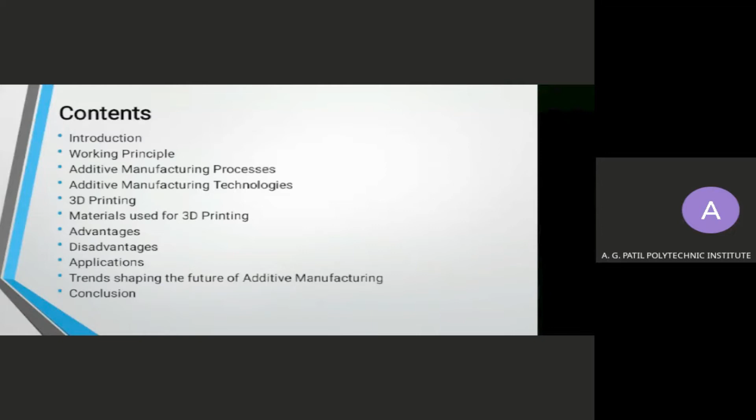So these are my contents. First of all, what is additive manufacturing? 3D printing or additive manufacturing is the construction of a three-dimensional object from a CAD model. As its name suggests, instead of removing material, it adds a layer of material one by one. In this process, material is deposited, joined, and solidified under computer control.

In the 1980s, 3D printing techniques were considered suitable only for production of functional or aesthetic prototypes. But from 2019, it is in the news for its precision, repeatability, and material range. The main advantage of 3D printing is to create complex shapes or geometries which are impossible to create or construct by hand. Fused deposition modeling, which uses a continuous filament of thermoplastic material, is the most common method used in recent days.

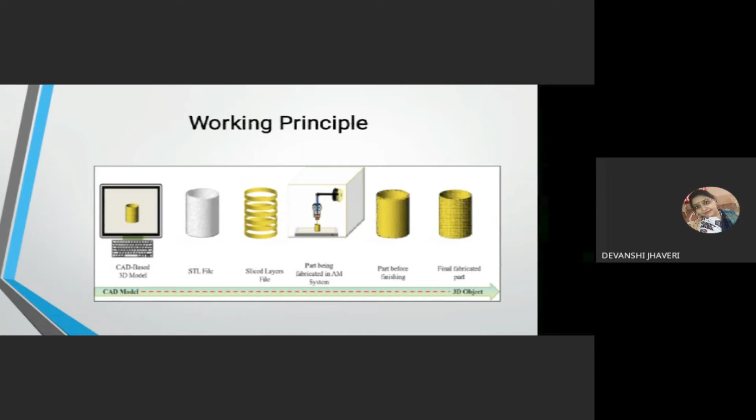The next one is part removal. In some cases, after building a part, it may need a cooling off period before removing the part from the machine. Depending on the machine and technology, removal could vary from simply peeling off the build platform in case of FDM, to wire eroding from the build plate in DMLS. The last step is post-processing, where the manufacturer thinks from the aesthetic point of view. Post-processing such as cleaning, polishing, painting are required to give an attractive look to the manufactured object.

Next slide, additive manufacturing technologies. These are the various additive manufacturing technologies. First one is binder jetting process. It selectively deposits a bonding agent or binding liquid to join the powder material to form a 3D part. It is different from other additive manufacturing techniques as it doesn't employ heat during the process to fuse the material.

Next one is directed energy deposition. It uses focused thermal energy such as a laser, electron beam, or plasma arc to melt and fuse the material as it is deposited to create a 3D object. It has two main types: one is LENS and another is EBAM.

Next is the material extrusion process. In this additive manufacturing technique, a continuous filament of thermoplastic is fed through a heated nozzle before being deposited layer by layer onto the build platform to create the object.

Next procedure is powder bed fusion, a manufacturing technique that uses either a laser beam or electron beam to melt and fuse the material to form 3D geometrical parts.

Next is sheet lamination. It uses sheets of material to create 3D objects by stacking them and laminating them using either adhesive or ultrasonic welding. Once the object is built, the unwanted areas of the sections are removed layer by layer.

Next process is vat polymerization. It uses a technique called photopolymerization, in which radiation curable resins or photopolymers are used to create 3D objects by selectively exposing them to ultraviolet light.

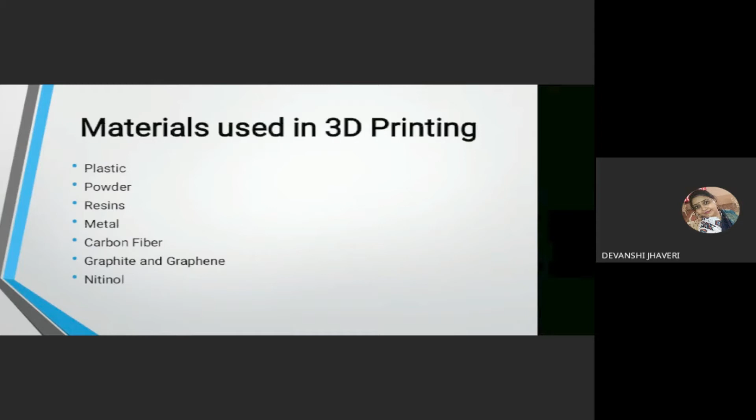So these are the materials used in 3D printing, like plastic, powder, resins, metal, carbon fiber, graphite and graphene, and nitinol.

Advantages of additive manufacturing. Here are various advantages we can achieve by using additive manufacturing, like saving on material and energy waste, prototype costs much less, small production runs are fast and less expensive, and much on-hand inventory is not needed. This means additive manufacturing requires only the specific quantity of material as per the dimensions of the object to be manufactured, so it doesn't require inventory of raw materials on a large scale.

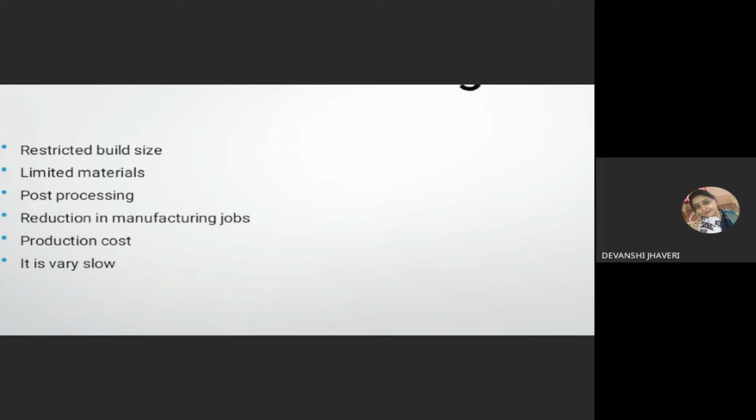So here are the disadvantages of additive manufacturing. Restricted build size: when we go for additive manufacturing, we have a limitation of size, and limited materials. Post-processing: additive manufacturing is a process which requires post-processing methods. It will also result in a reduction of manufacturing jobs. Production cost is high, and in case of additive manufacturing, it is also a very slow process.

So these are the applications of additive manufacturing. First one is automotive; it is used to make prototypes of brackets and door handles, suspension wishbones and dashboard interfaces, headlights, and etc. Next one is consumer products: jewelry manufacturing, dental products, medical, educational and engineering.

Next one is energy. 3D printing for energy applications explores current and future perspectives of 3D printing for the fabrication of high value added complex devices.

Next one is medical. Bioprinters are capable of creating functional tissues.

Next one is transportation. It aims to create lighter and stronger resin structures that can be easily transported from one place to another. These are the trends shaping the future of additive manufacturing.

Next is increased focus on machine connectivity. This means if a manufacturer wants to create a prototype of a jet engine and uses machine connectivity, he is going to connect the 3D printers with each other. Suppose there are four 3D printers, in which one is responsible for manufacturing the low pressure and high pressure turbine, one is for the combustion chamber, and one is for the turbine shaft.

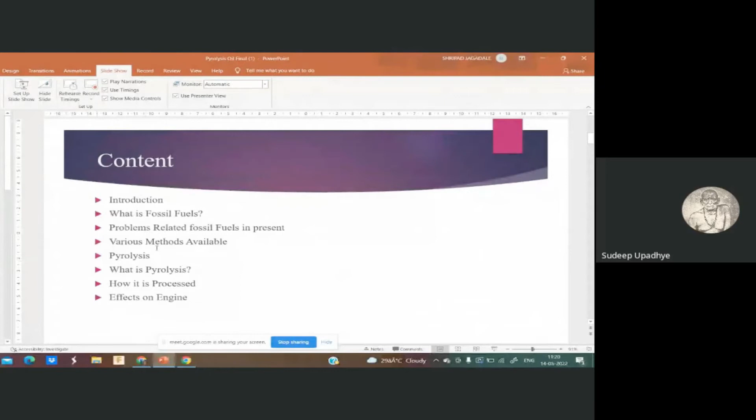So ma'am, is it visible to you all? Yeah yeah, this is visible. Okay so shall I start? You can start, Soham. So a very good morning, you are not visible, please turn on your camera. Okay sir, just a minute. Wait, let me have the light.

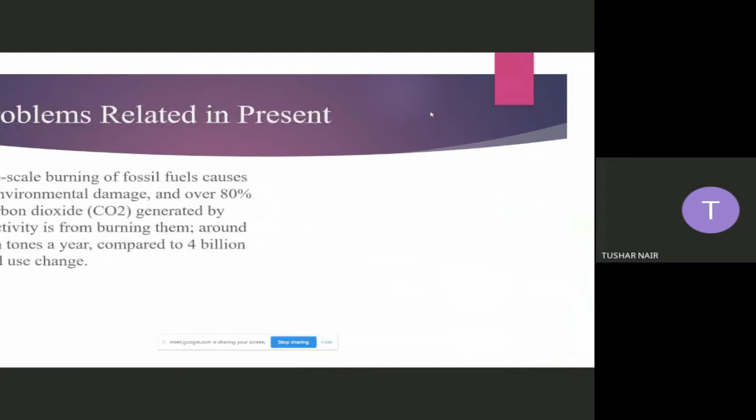What is fossil fuel? Large scale burning of fossil fuel causes serious environmental damage, and over 80% of carbon dioxide generated by human activities is from burning them. There are many problems related to this, like carbon dioxide and other pollution. Basically, we all know that fossil fuel is from decaying animals, etc.

How much are petrol and diesel prices expected to increase? There's a methodology called demand and supply - when demand is less, the price is low. But nowadays we can see the price of petrol touching the skies. Why is that so? Because fuel is not available, or maybe less in amount nowadays, and as demand increases, the price also keeps increasing.

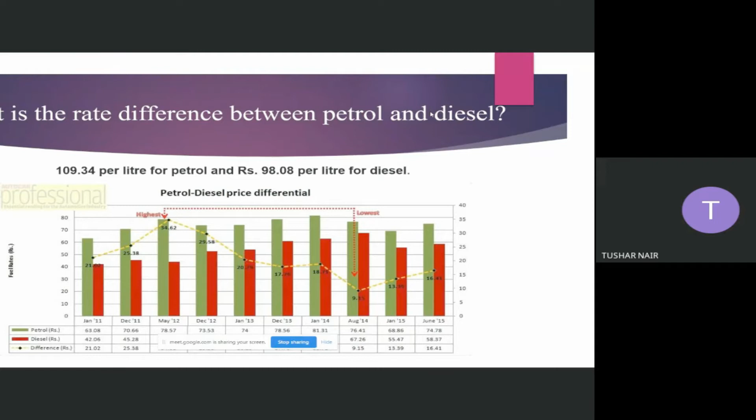So basically, the most wonderful and dangerous material - if I'm not wrong, we can say plastic is the wonderful material. We humans wanted something that lasts long and weighs less. There's a proverb in English: be careful what you wish for. And yeah, plastic was invented. The positive point of plastic is that it lasts a very long period, more than 500 years - which is also its most negative point.

It causes a lot of pollution, whether air, water, or land. Plastic is something we can't bury in the ground. The ocean can't handle it, life can't decay it, and life can't manage it. So is there any alternate source for this? The answer is yes - there are many ways to reduce plastic pollution by converting plastic into useful resources.

We know plastic is just crude oil that has been processed in different ways, and through pyrolysis we can reverse it. Plastic pyrolysis is a very effective process where plastic is exposed to high temperature in the absence of oxygen. Pyro means heat and lysis means breakdown.

At any given temperature, molecules are in a vibrating state - this is called molecular vibration. The frequency at which molecules vibrate is directly proportional to the temperature of the molecules. During pyrolysis, molecules are subjected to very high temperature, leading to very high molecular vibration. At this high vibration, molecules start breaking down into smaller molecules, and this is known as pyrolysis. Plastic is hard to break down, so we have to add a catalyst to it.

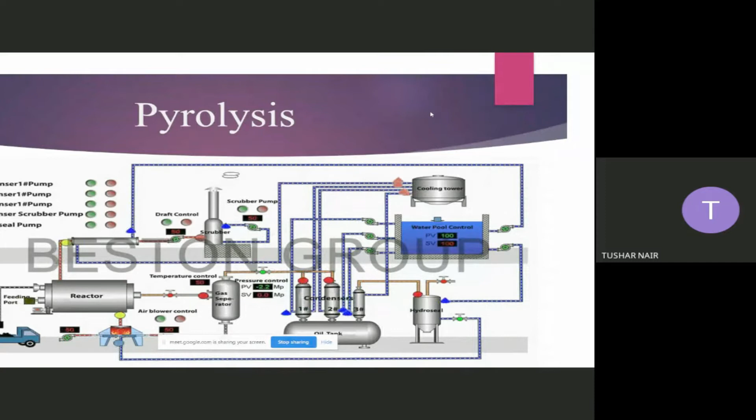This gas is sent into a condenser, where condensation takes place, and finally it's sent for refining, where fuel is created. So hence we can say 80% oil, 15% gas, and 5% carbon black is produced.

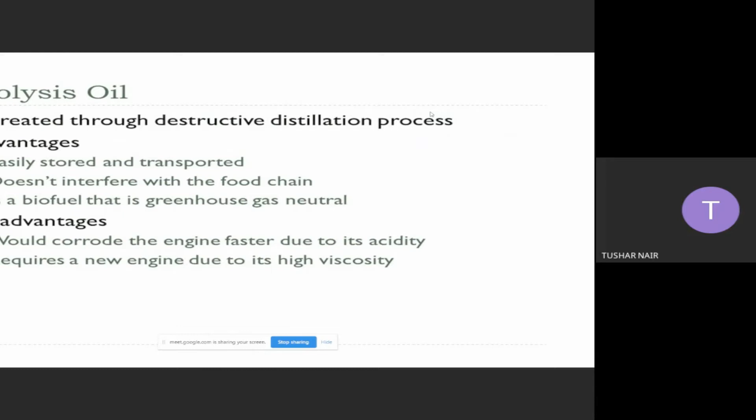So here are the advantages and disadvantages. There are much more job availabilities in this sector. We can say that pyrolysis is the best method, as we humans who created plastic are also going to be harmful due to this, as it generates fuel directly from it.

So, conclusion. We can say this is one of the steps towards our green environment, which will maintain our green and beautiful Mother Earth. This pyrolysis is very important as it also helps in fuel generation, which sounds really interesting. Thank you.

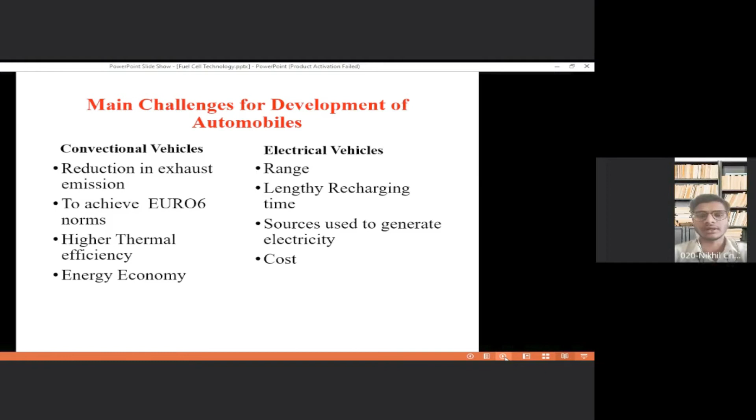And also, the fuels we use for conventional vehicles are all imported from outside. Means we are spending a lot of money importing and purchasing that fuel. So these were all the problems.

So to give the solution to these problems, we are here with a new concept, which is fuel cell. So basically, what is a fuel cell, I would like to explain in brief. Fuel cell is like a battery, but it is not a battery. Why am I saying it is like a battery? Because it produces electricity through an electrochemical process. That is the single similarity between a battery and a fuel cell.

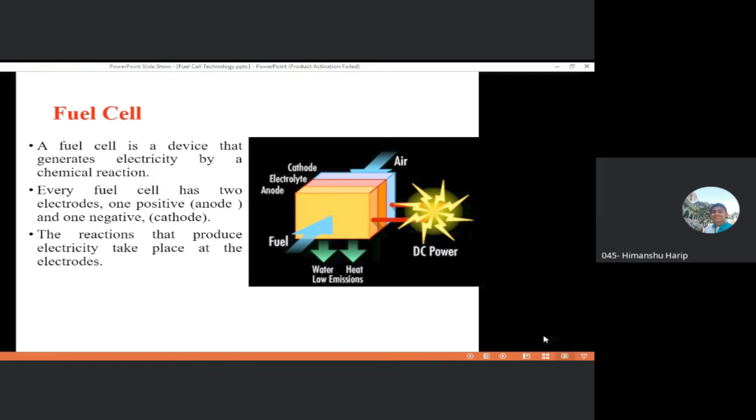If a fuel cell is combined together to form a fuel cell stack, enough power is able to be created to power a car or a truck. This is a simple animation showing the working of a fuel cell.

Hydrogen from an onboard pressurized tank is supplied to a catalyst where electrons are stripped from the parent hydrogen. These electrons are supplied to the electric motors or to the auxiliary electrical components which require electricity to run.

Once the work of the extracted electrons is done, they come back to the parent fuel cell where they reunite with the parent hydrogen in the presence of oxygen. They meet in the ratio of two atoms of hydrogen and one atom of oxygen, which is nothing but water, H2O.

This water is used to cool down the fuel cell stack. The accelerated electrons generate a lot of heat, ranging between 100 to 200 degrees Celsius. This heat is cooled down with the help of water, a byproduct of the fuel cell, before it is dripped out of the vehicle tailpipe as water vapor or distilled water.

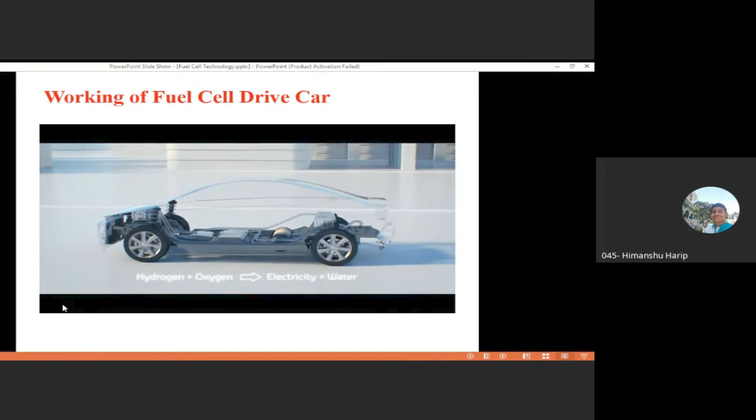So this is the fuel cell vehicle, with the video given to us by Toyota itself. The basic chemical reaction that takes place is hydrogen plus oxygen gives electricity plus water.

It consists of a hydrogen tank, a battery, a fuel cell stack, a boost converter, an electric motor, a power converter, and an electrical ECU.

In normal conditions, hydrogen is supplied to the fuel cell stack from the onboard pressurized tank. Oxygen is taken in from ambient air and supplied to the fuel cell stack, and the energy is given to the motor, with the output being nothing but water.

During filling, the hydrogen is pressurized under 700 bar or 70 MPa, and the refueling time is nearly 3 minutes, giving the user an experience similar to that of an IC engine car.

During very low load conditions, when there is absolutely no load on the motors driving the car, the energy is supplied from the battery and the motor runs just like in a simple electric vehicle.

During low load conditions, the energy is supplied from the fuel cell stack, and the motor runs. As the motor runs, it charges the battery, so basically the fuel cell stack charges the battery.

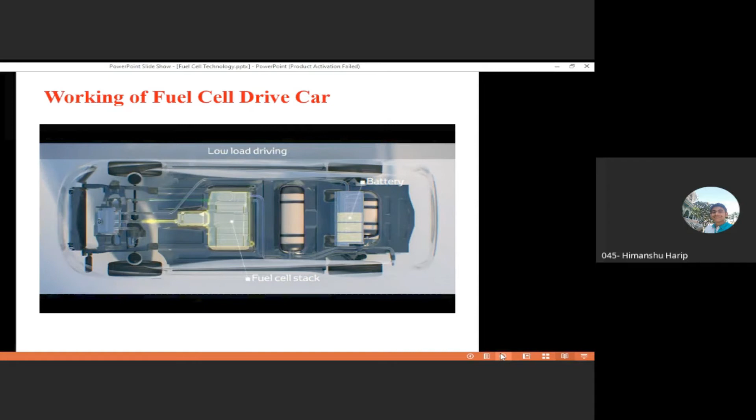During high load conditions, such as driving in a hilly or ghat region, the energy is supplied from both the battery and the fuel cell stack. This decreases the load on the battery and increases the efficiency of the electric vehicle along with the increase in range.

During energy recovery mode, such as when going downhill, the motor acts as a generator and charges the battery. It's simple.

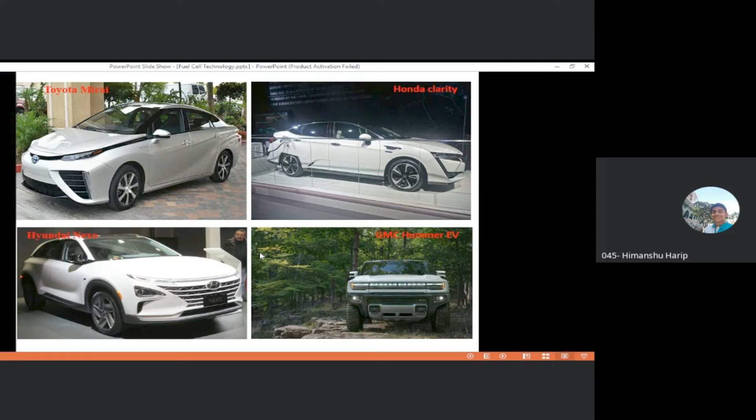It is a huge vehicle. It does not use that much of it, it uses 20% fuel cell vehicle technology. The rest is totally based on electric vehicle technology, as it's a huge car.

And these are some Indian companies, such as Tata Motors. They have bought 15 hydrogen-based fuel cell vehicles, which we can see on the Mumbai Pune Expressway easily.

So these are the fuel cell aspects: the mileage or average that a fuel cell vehicle can achieve is 70 miles per equivalent gallon (MPEG). The cost of 1 liter of hydrogen is just rupees 30 to 60, compared to petrol which is nearly 110 to 120 rupees per liter. The time required for refueling is also less than that of a gasoline engine.

The cost of a sedan hydrogen fuel cell vehicle is a bit more, nearly 30 to 40 lakhs. They are safer than IC engine powered vehicles, as hydrogen is the lightest gas in the periodic table. So these are the references we have referred to.

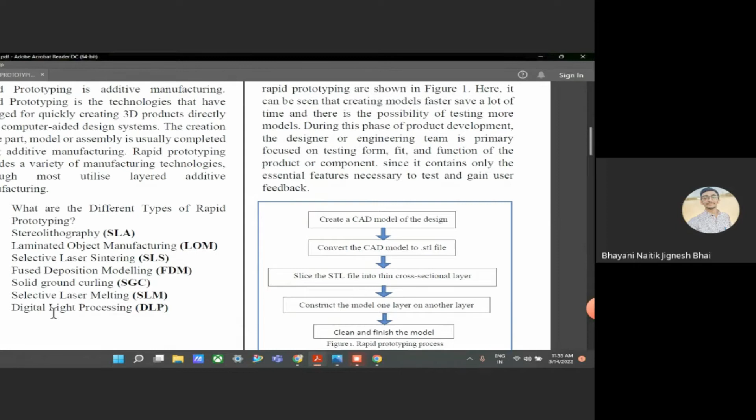The process is the rapid prototyping process. The steps involved in product development using rapid prototyping are shown in the figure. It can be seen that creating a model faster saves a lot of time, and there is the possibility of testing more models during the phase of product development.

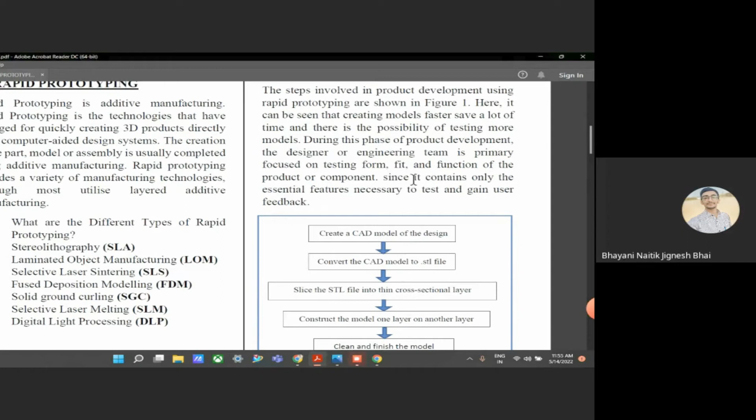The designer or engineering team is primarily focused on testing form, fit, and function of the product or component, since it contains only the essential features necessary to test and gain feedback.

Our steps for rapid prototyping are this: first, we create a CAD model of the design if we have a model. If we don't have a model, we take dimensions using a CMM machine, that is a coordinate measuring machine, and then convert the file into STL files.

Then these STL files are converted into a slice format for manufacturing in a 3D printer, and then the model is constructed one layer at a time, followed by post-processing methods like cleaning, finishing, and measuring.

Rapid prototyping is a digital manufacturing process. This allows product designers to test multiple iterations of a design within a short period of time and finalize the design more quickly. It could include building a model from thermoplastic, PLA, nylon, ABS, acrylic-based photopolymers, or liquid silicone rubber.

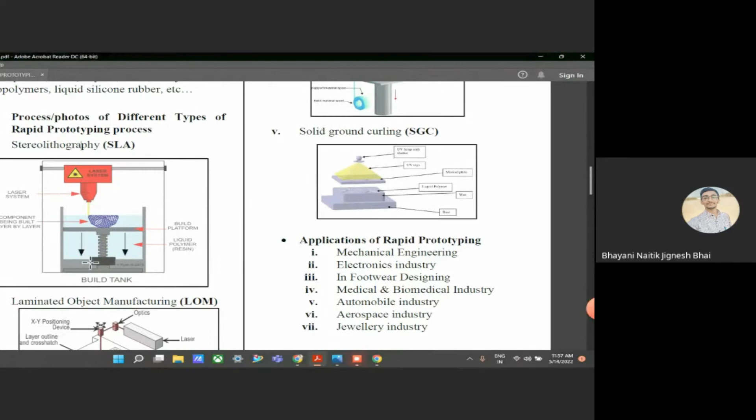These are process photos of different types of rapid prototyping. First is laser stereolithography, this photo, and this is laminated object manufacturing. This is selective laser sintering. And this is fused deposition modeling.

This method is very simple and commonly used in 3D printing. So last is solid ground curing.

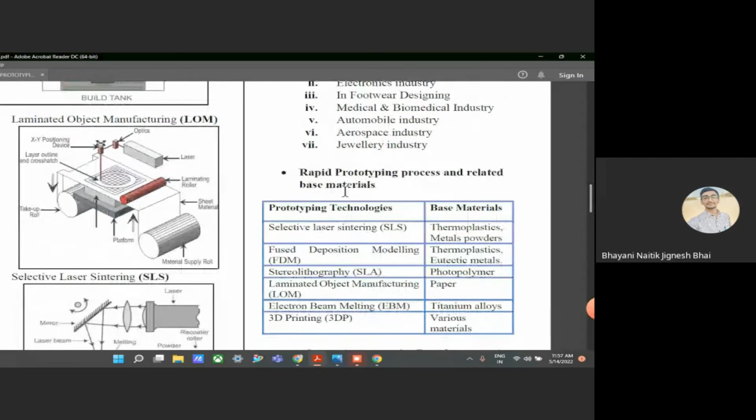Applications of the rapid prototyping process include mechanical engineering, electronic industry, footwear designing, medical and biomedical industry, automobile, aerospace, and jewelry. These are rapid prototyping related base materials for 3D printing or related processes.

First is SLS, its base material is thermoplastic and metal powders. Second, FDM, there it's thermoplastic and eutectic metals. Third one is stereolithography, there it's photopolymer and liquid resin. There is used paper.

Then alternative names of rapid prototyping: first, additive manufacturing, layer manufacturing, direct CAD manufacturing, and solid freeform fabrication.

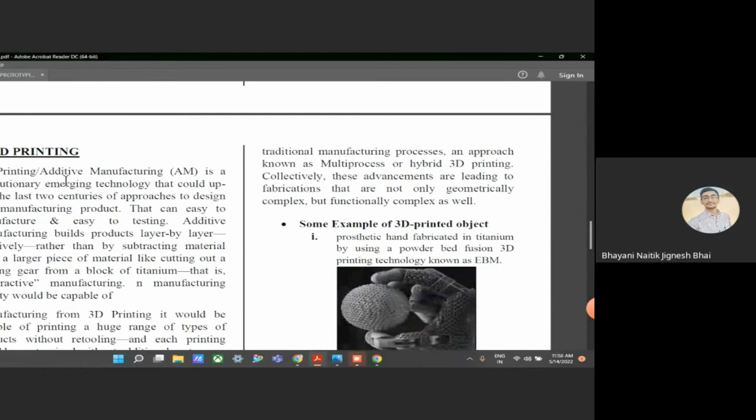Now our topic is 3D printing. 3D printing, also known as additive manufacturing, is a revolutionary emerging technology that could upend the last two centuries of approaches to design and manufacturing, producing products that are easy to manufacture and easy to test.

Additive manufacturing builds products layer by layer additively, rather than by subtracting material from a large piece of material, like cutting a landing gear from a block of titanium.

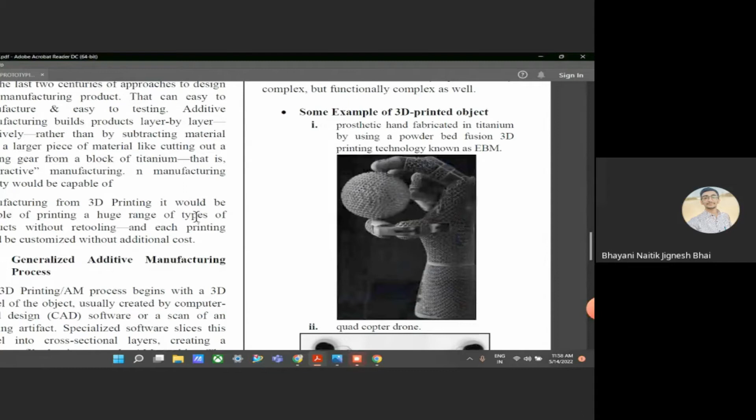That is subtractive manufacturing. A manufacturing facility capable of 3D printing would be capable of printing a huge range of types of products without retooling, and each printed item could be customized without any additional cost.

Now, the generalized additive manufacturing process. The 3D printing / additive manufacturing process begins with a 3D model of the object, usually created by CAD software or a scan of an existing artifact. Specialized software slices this model into cross-sectional layers, creating a computer file that is sent to the additive manufacturing machine.

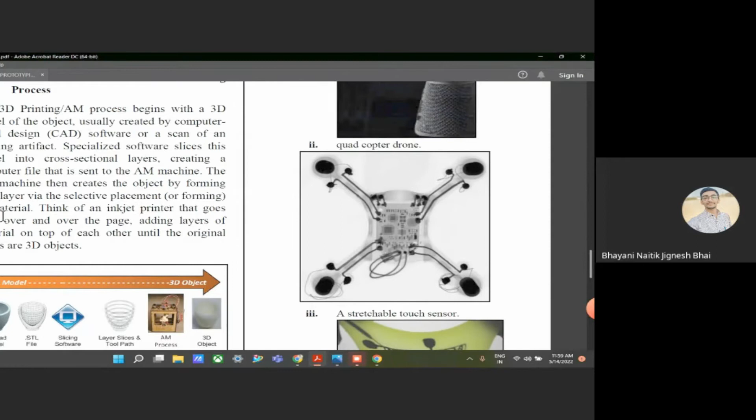The additive manufacturing machine then creates the object by forming each layer via selective placement or forming of material. Think of an inkjet printer that goes back and forth over the page, adding layers of material on top of each other until the work is complete. This is a diagram.

First we create a CAD model, then it's converted into an STL file, then transferred to slicer software where they slice the part, then it goes through the additive manufacturing process using a 3D printer, followed by post-processing to complete the project.

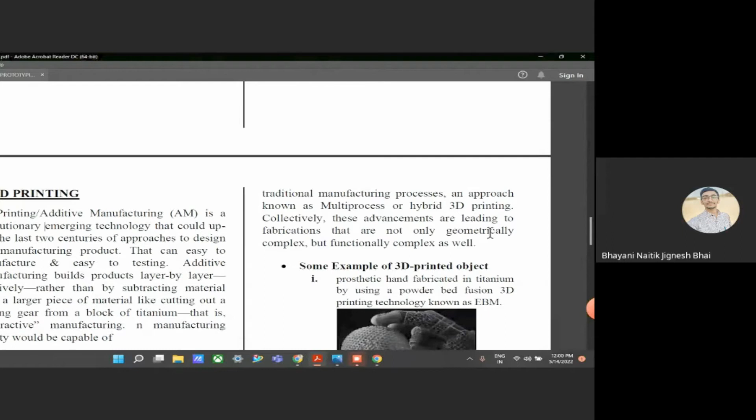Advances in 3D printing: for the technology to become more widely adopted in mainstream manufacturing, 3D printing must provide end-use products by fabricating more than just simple structures, with sufficient mechanical strength to retain shape. Recently, research has enabled the use of new materials with commercial 3D printers, and customized printers have been enhanced with complementary traditional manufacturing processes, known as multi-process or hybrid 3D printing. Collectively, these advancements are leading to fabrications that are not only geometrically complex but functionally complex as well.

These are some examples of 3D printed objects. First is a prosthetic hand fabricated in titanium using a powder bed fusion 3D printing technology known as EBM. Second is a quadcopter, which is a drone-type structure.

This is a stretchable touch sensor. It's a sensor, but you can stretch it. This is a capacitive touch sensor - you can click or touch this sensor.

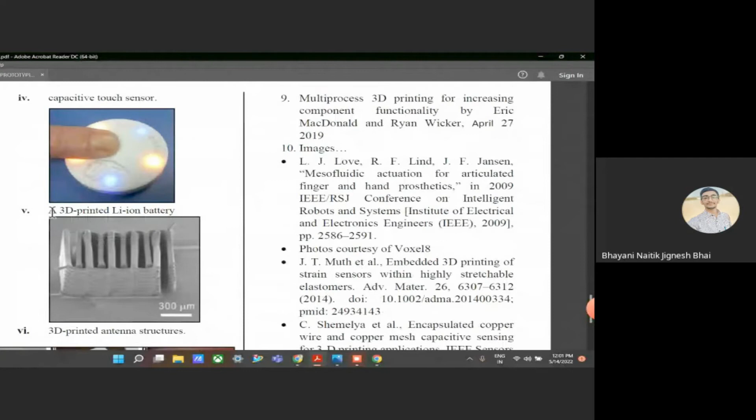This is a 3D printed lithium-ion battery, also used in our mobile phones or electronic gadgets. And finally, this is the 3D printed antenna structure, also known as NFC for our mobiles, related to tag cards and related technologies.

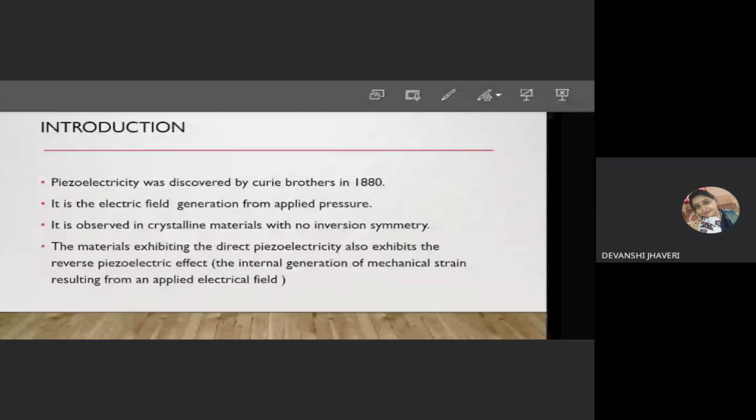Let's talk about piezoelectric crystals. We can get the crystals naturally as well as synthetically. Naturally, we can get silk, dentin, enamel, quartz, and sugarcane is also a piezoelectric crystal. Synthetically, we can get lithium sulfate, zinc oxide, and too many other things.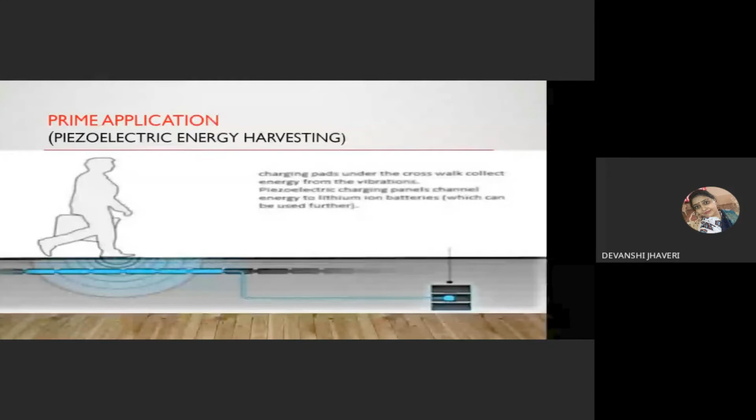We all know there is a problem for electric vehicles: the charging station. In all of India, we have just 1,600 charging stations. If we introduce piezoelectric charging pads under footpaths, we can directly give supply to those electric charging stations.

It will be the solution to that problem. These are some other applications. We all know our 21st century person is too much of a gym enthusiast - out of 100 people, 40 go to the gym. That's why there are too many vibrations and noises in the gym because of equipment. If we use the piezoelectricity concept there, we can get more and more energy.

Okay, so these are some other applications. First is about Zumba classes. We all know that 18 plus people are going for enjoyment on the weekend.

There, the vibrations as well as noise are much higher than in the gym. That's why if we use that here, we can get more energy efficiently.

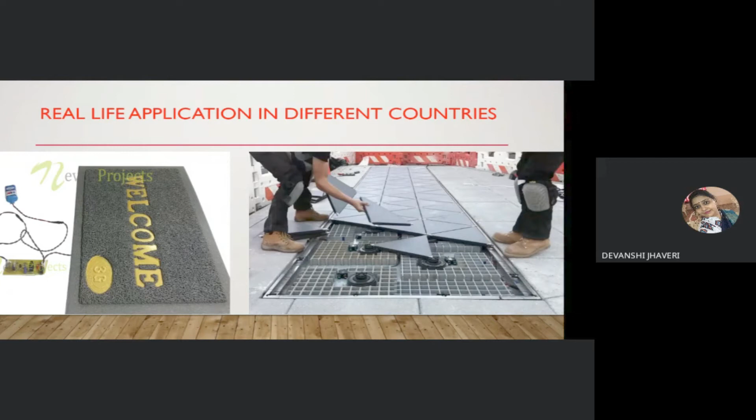Disadvantages are the crystal can be cracked by overstress. As I previously mentioned, if you use vehicles as well as heavy loads on that, it will obviously crack. It may also be affected by long use at high temperature.

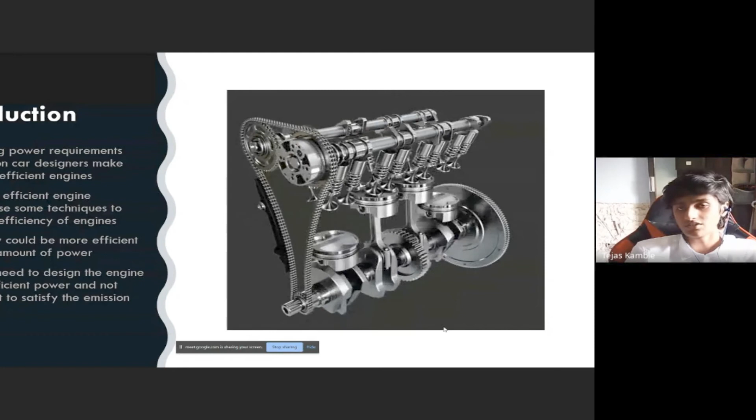Today, due to rising pollution and rising power and performance requirements, pollution is a huge issue faced by car manufacturers. To eradicate the pollution, they are using various techniques and technologies to make their engines more efficient and more powerful. Engineers do this so that the engines could meet the newer emission regulations.

Let us see the points that I'm going to be covering in my presentation. We are going to talk about variable valve timing systems, downsizing engines, direct injection systems, and twin scroll turbochargers.

Let us talk about the variable valve timing system. This is a very common feature used in many vehicles today, even economy cars have it. What it does is change the timing of valves, so they either open late into a combustion cycle or earlier into it. If the valve opens in early stages of a combustion cycle, it's called advanced timing. When the valves open late into the combustion cycle, it's called retarded timing.

Advanced timing is used when the power requirement is very high, and more retarded timing is used when the power requirement is low and the engine needs to conserve fuel. Most variable valve timing systems are oriented towards economy, but some are more tuned towards performance, like Honda's iVTEC system.

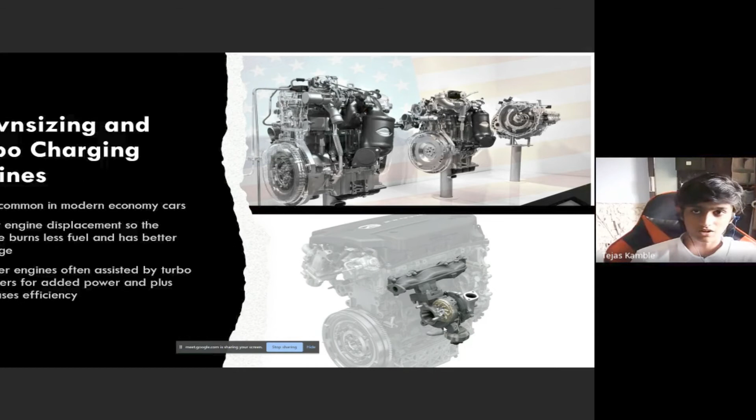Downsizing and turbocharging engines is a very common technique used by a lot of car manufacturers today. What they do is decrease the displacement of an engine so it consumes less fuel. Because these engines consume less fuel, they are less powerful, so to have adequate power, they are installed with turbochargers. Adding turbochargers increases the efficiency of an engine as well as giving it some extra performance boost.

Here is a fun fact for you guys: most modern engines today are actually smaller than the party-sized Coke bottles you get in stores.

Direct injection systems: the efficiency of an engine majorly depends upon the fuel injection system used in the vehicle. Direct injection is a very common technique used in modern cars today. What it does is inject the fuel directly into the combustion chamber, which helps the fuel atomize with the air better, giving a very clean burn. This increases the efficiency of an engine as the fuel burns a lot better than any older port injection systems.

The only drawback of the system is that it allows carbon deposits to accumulate over the intake valve, which may restrict airflow into the combustion chamber. But this isn't a huge deal, as the power loss is very minimum, and there are cleaners out there in the market. Some performance cars even use twin injection systems, combining a port and a direct injection system.

Twin scroll turbochargers are just regular turbochargers, but instead of having one inlet, they have two inlets. What it does is separate the cylinders having the same exhaust pulse so they don't collide and cause a disturbance in the airflow. This helps so that under immediate acceleration, there is no collision of the exhaust pulses, and the turbo can spool up a lot quicker, giving immediate boost.

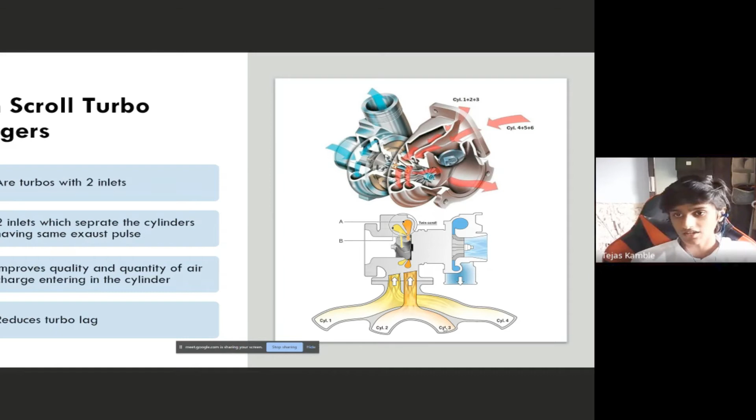Twin scroll turbochargers are better in every way than single scroll turbochargers, as they eradicate a huge issue of turbocharged engines, which is turbo lag. There are also other miscellaneous advancements made in the engine block itself, like reducing the intake and exhaust valve angles, running higher compression ratios, and making engine components out of lightweight aluminum parts.

Now, all of this won't sound like much, but they play a major role in the performance and efficiency of any engine. So to conclude my topic, there are still a lot of advancements being made in internal combustion engines, as these engines have a huge advantage over electric vehicles.

Plus, most car companies don't have enough money to spend on entirely new R&D for a new electric vehicle platform, so they rely on normal internal combustion engines. There's still a lot of scope for these engines to be more efficient than they are now, and we can make them as efficient as electric vehicles as well. And who doesn't like a good sounding engine in their car? So here are some of the references I used for making this presentation. Thank you.

Hello. Yeah, miss. Where are you from, Tejas? I'm from Patil Polytechnic, ma'am, from Mumbai. In which city? From Mumbai. Okay, you're from Mumbai. Yeah, fine, fine.

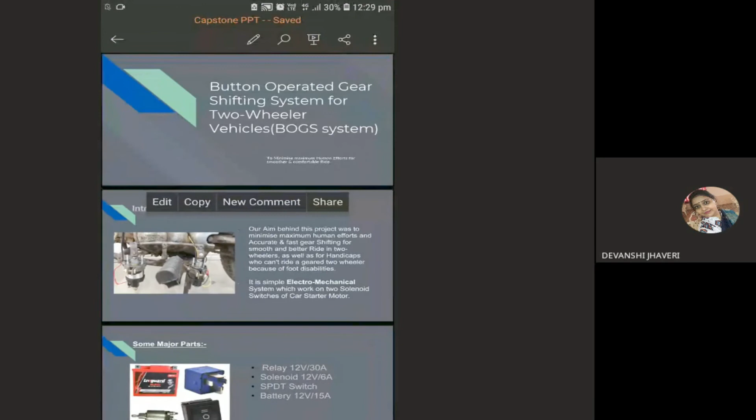Today I am here with my capstone project, as well as our paper presentation: button operated gear shifting system for two-wheeler vehicles, BOGS system.

Let's understand the need for this system. Our aim behind this project was to minimize human effort, as well as benefit handicapped people who have a prosthetic leg or some foot disabilities.

It is a simple electromechanical system which works on two solenoid switches. The further explanation would be given by Ninad Bhagat.

Thank you, Shreyas. Now I would like to take on the further presentation. I would just explain some small major parts of the system.

They mostly consist of common relays, 12 volt 30A, a solenoid which is mostly available in starter motors, an SPDT switch common in the market, and a battery which is available in normal bikes. So all these parts are easily available in the market at a cheaper price in local markets.

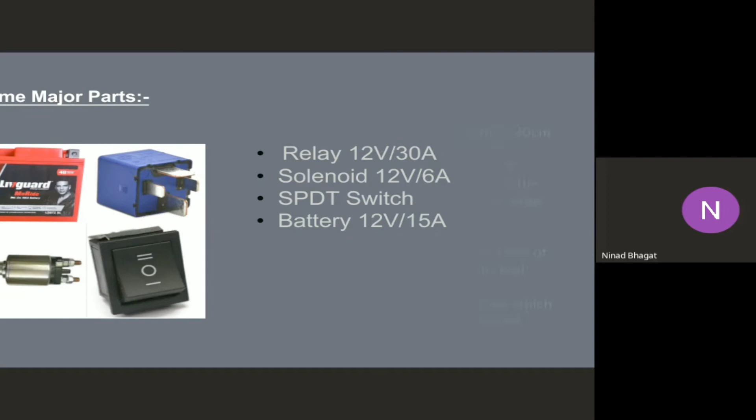In short, I would like to explain the construction and mounting of this system. It mostly consists of a rod which we have made, approximately 22 centimeters, attached with two solenoids below them.

The rear one is tilted by 1 degree and the front one is tilted by 2 degrees. There are two C clamps holding the solenoids for their proper operation, and they are welded on the bottom side or the chassis of the bike.

Hello, hello. Am I audible, ma'am? Yes, you are audible. Go on. All right.

The problem with the discharging of the battery will be solved as it gets charged while driving. For the further presentation, I would like to call my mate to take on the presentation.

Thank you, Ninad. So let's talk about the drawbacks and overcomes, like pros and cons. Side stand might be relocated. However, how we have created this whole unit, we are going to weld this on the lower tube where the conventional gear lever is placed.

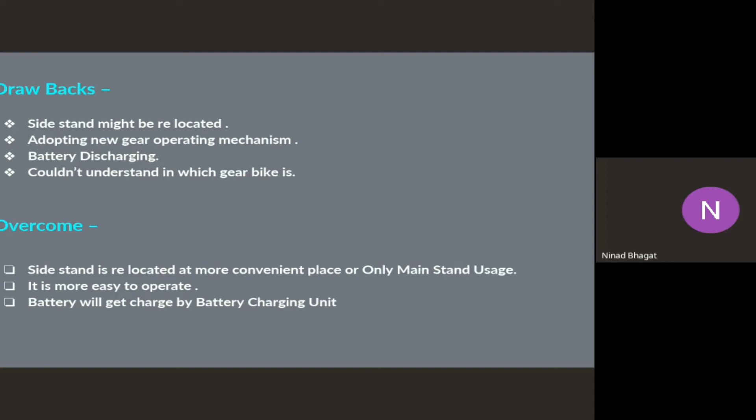It is more easy to operate. Our system is more easy to operate. Battery would be charged by a battery charging unit.

So as I told you in the previous slide, how will we know which gear we are in? We are going to use another system called a gear indicator, which will indicate which gear you are in when you shift.

Moving further, let's talk about the future scope of this system. In future, we are planning to make another system which will actuate the clutch automatically whenever you shift the gear with the SPDT switch.

This system will consist of a servo motor as well as an Arduino. The Arduino will actuate the motor for gradual release of the clutch.

The further future scope would be a fully automatic gear shifting system, in which we are going to incorporate two microprocessing units. One is the Arduino, which as seen in the previous slide will control the clutch, and our current system would be controlled by the Raspberry Pi.

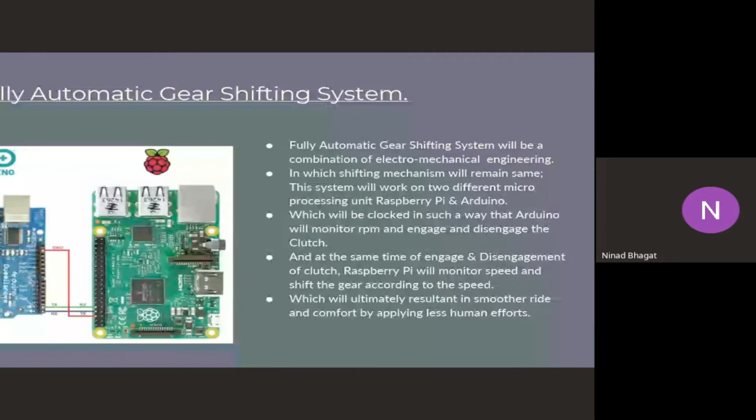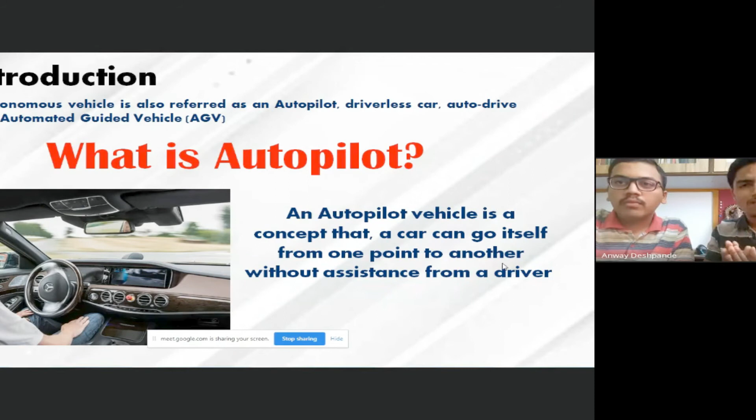Autonomous vehicles are also referred to as the autopilot system. Now what is this autopilot system? This concept is where the driver or the car can go by itself without any driver assistance, from one point to another. In the whole world, there are 44 plus companies investing in autopilot vehicles, such as Tesla, Mercedes, Jaguar, Apple, etc.

Now we can classify this autopilot system in some levels. In the first level, the adaptive cruise control function is given to the vehicle. What is this adaptive cruise control function? In this system, the vehicle maintains the speed to maintain safe distance between the vehicle in front of it through the sensors.

In the second level, along with adaptive cruise control system, lane keep assist system is featured, in which the driver can get the function of parking, etc., and the car can also manage lane while driving.

In the third level, the driver can take off his attention from driving slightly, but he must be aware to take control of the car in some bad weather or road conditions. In level 4 and 5, the car can be fully automated in any weather and road conditions. There is no need for the driver to take control of the car. The car can go itself.

Now, the best example of this system in India is Mahindra XUV 700. Mahindra has introduced this system in the XUV 700 for the first time in our country. This system is known as ADAS, which means Advanced Driver Assistance System, in which a group of technologies work together for functions such as parking, adaptive cruise control system, lane keep assist system, etc.

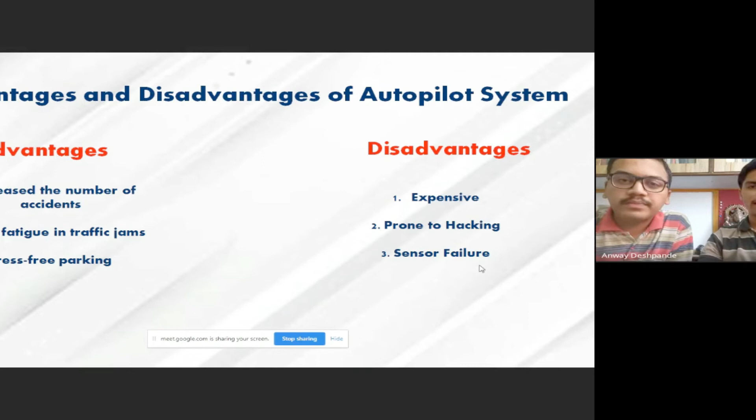Disadvantages - we can't really call them disadvantages, but every coin has both sides. First point is it's expensive, due to lots of sensors and computer processors, the cost might be high. Second is the possibility of hacking - due to lots of technologies, computer processes and sensors, it can be hacked. Third is sensor failure - the sensor may fail, and because of that an accident or mishap can happen.

Now we are heading to our summary. From our presentation, we can say that this autopilot or autonomous vehicle system has some positives and negatives. First, this system is slightly costly - our normal or middle class family can't afford this system. But the advantages are that the driver doesn't need attention, and fatigue-free, tension-free driving can be done.

After some years, the number of innovations and researches can be developed through it, and these problems can be overcome. Also, this system or project has lots of entrepreneurship development and business opportunities. We youth can do business in this system, producing the components of the products used in this system. This system has a lot of potential.

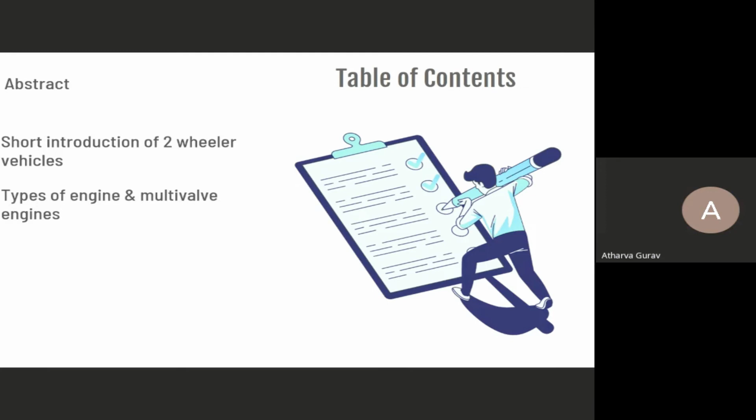So let's see what we will be seeing through this PPT. First we will see the abstract of our research. Next we will give a short introduction about two-wheeler vehicles, which we all know. Next we will move on to the types of engines and multi-valve engines. Further, we will see the valve arrangement and a comparative study of three-valve engine, two-valve engine, and four-valve engine. And at last we will summarize our research. So let's start with the abstract.

Our research is entitled three-valve engine, which will highlight the structural and operational geometry that the two-wheeler works on. The model selected for this research was a LML Adreno, manufactured in 2001, which is a rare sighting on Indian roads. The main aim of this research is to demonstrate how a three-valve engine works, as there is no actual model available due to a limited production run of this kind of engine compared to conventional two-valve and four-valve engines.

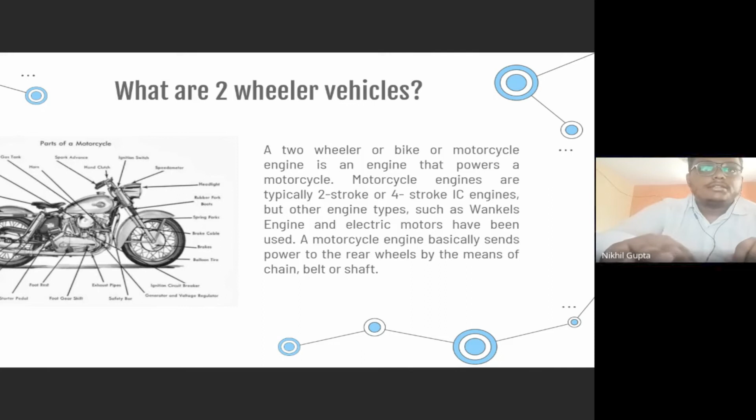Next, we will move on to the types of engines and multi-valve engines. Like every other engineering component or machine, engines are classified in broad configurations. Here we have listed some of the types based on the number of cylinders used in the engine.

Single cylinder is used in almost every two-wheeler in the market. Parallel twin engine construction is often seen on entry-level sports bikes such as the Yamaha R3 or Kawasaki Ninja 300, but is also in use at even larger capacity in cruisers.

Inline engine. An inline engine uses three parallel cylinders housed in the same cylinder block. The Triumph and the MV Brutale 800 are two such examples.

Flat engines. The horizontal or flat layout of the engine is commonly known as a boxer engine, where the two pistons are laid out on opposite sides of a crankshaft. Next, V-engine. As the name suggests, the arrangement of the cylinders forms a V shape. The 2019 Aprilia RSV4 1100 Factory or the Ducati V4 are some of the popular examples of V engines.

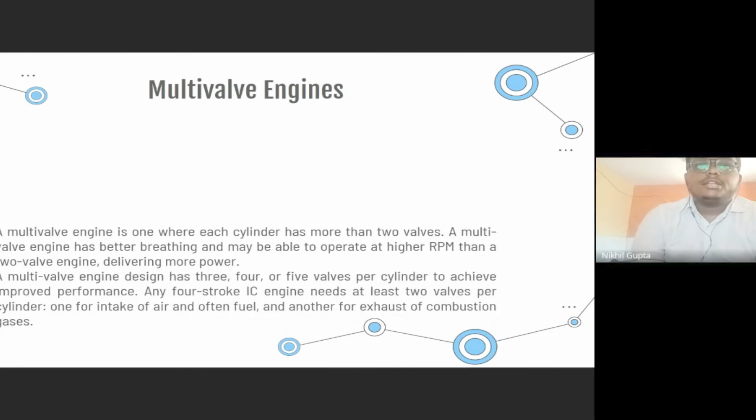Multi-valve engines are basically a valve configuration. Let's see what multi-valve engines are. A multi-valve engine is one where each cylinder has more than two valves. A multi-valve engine has better breathing and may be able to operate at higher RPM than a two-valve engine, delivering more power. A multi-valve engine design has three, four, or five valves per cylinder to achieve improved performance.

Any four-stroke IC engine needs at least two valves per cylinder, one for intake of air and fuel, and another for exhaust of combustion gases. Adding more valves increases valve area and improves the flow of intake and exhaust gases, thereby enhancing combustion, volumetric efficiency, and power output. Multi-valve geometry allows the spark plug to be ideally located within the combustion chamber for flame propagation.

Let's now see the various types: two-valve, three-valve, four-valve, five-valve, and so on. For this research, we will study only the first three types. So let us start with the conventional two-valve arrangement.

Two-valve: hearing the name two-valve, you may have realized there are two valves in the engine cylinder. The valve's job is getting the right amount of air and fuel into the cylinder. A two-valve engine has two valves: one is the intake valve and the second one is the exhaust valve. The two-valve engine is used more in the commuter segment, like bike engines.

Some advantages of this type are that the price of the engine is comparatively less than a four-valve engine. It takes a limited amount of air-fuel, so the mileage is much higher than other engines, and performance is acceptable. Companies can make two-valve engines very easily. Some prominent examples are the Suzuki Access, Honda CB Shine, etc. Now we will next see the three-valve arrangement.

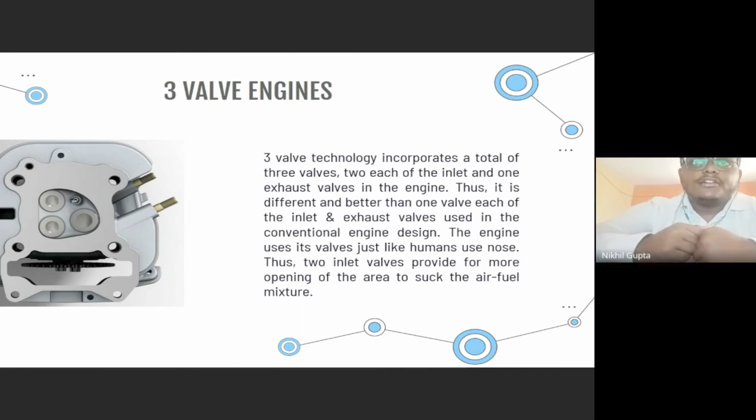Three-valve technology incorporates a total of three valves: two inlet valves and one exhaust valve in the engine. This is different and better than the conventional two-valve engine design. The engine has two valves just like a human's nose, so the two inlet valves provide more opening area to suck in the air-fuel mixture. Some prominent examples of three-valve engines are Vespa VXL 125 and VXL 150, TVS 120, Ntorq 125, and TVS Victor.

Next, we will see the four-valve arrangement. This technology incorporates four valves, two each for inlet and exhaust, in the engine. The two inlet valves have more opening area to suck the air-fuel mixture. The cylinder head with four-valve technology increases the combustion area covered by the valves, which can increase it up to 50% compared to a two-valve design. This improves engine performance such as power, throttle response, and pickup at all engine speeds. Some prominent examples of four-valve arrangements are Bajaj Dominar 400 and TVS Apache RTR 200 four valve.

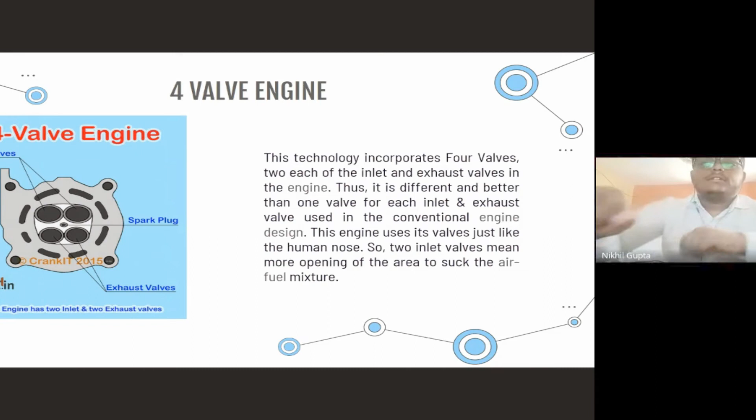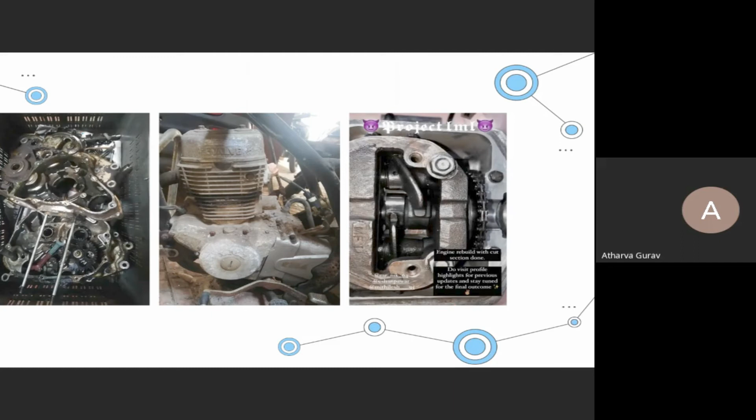The cam arrangement used for a two-valve engine is SOHC, that is single overhead cam. The three-valve engine can be used with a single overhead cam, SOHC, or a DOHC, that is dual overhead cam, which is an added advantage of a three-valve engine. The four-valve engine uses a cam arrangement of DOHC, dual overhead cam.

Next is the mileage. The two-valve engine produces a moderate mileage sufficient for practical usage. A three-valve engine produces better mileage than a two-valve engine, as the extra inlet valve helps in better combustion and performance. The four-valve engine, being the latest technology, has better mileage and better power output with a quick throttle response. The power output in a two-valve engine is quite moderate for practical usage. The three-valve engine produces better power output, almost close to a four-valve engine.

The emissions of a two-valve engine are quite more, as it is conventional technology used in the engine. The three-valve and four-valve engines produce lesser emissions because more research and development is involved in producing them. The throttle response for a two-valve engine is quite poor. The three-valve engine has an adequate throttle response, and the four-valve has a quicker throttle response.

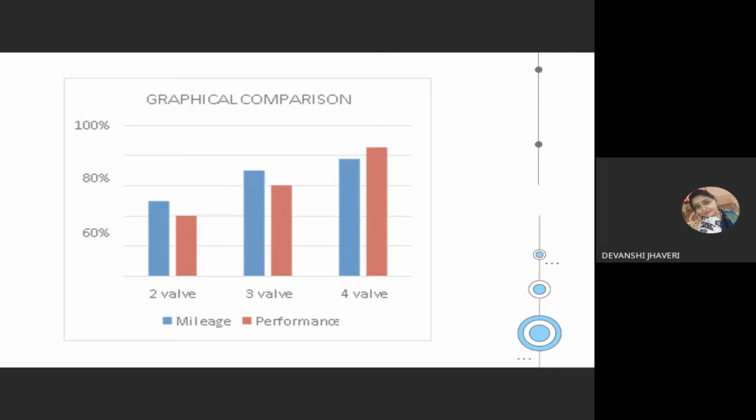Hello, ma'am. Sorry to interrupt, but your presentation has gone more than 15 minutes. The timing was supposed to be 10 minutes, plus or minus two is okay, but you've taken almost 15 minutes, more than 15. Okay ma'am, only one slide is remaining. Okay fine, then I will summarize my points.

To simplify further, if we compare two popular scooters, Ntorq and Access 125, the Access produces a torque figure of 9.5 Newton meters at 5,500 rpm, and the Ntorq produces 10.5 Newton meters of torque at the same RPM.

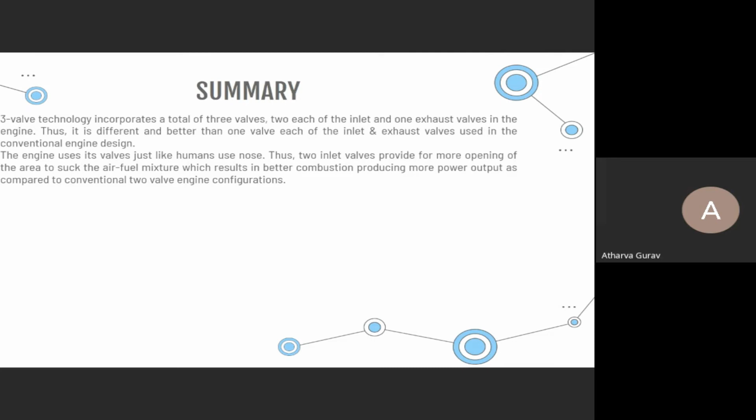Let's summarize the points. The three valve technology incorporates three valves, two inlet and one outlet, which is far better than the conventional two valve engine design. The engine uses two inlet valves to provide more opening and area to suck in more air-fuel mixture, resulting in more combustion and more power output compared to conventional two valve engines.

As India is a mass consumer for two wheelers, the segment is divided into commuter and performance segments. Three valve technology is a boost for buyers who want performance and mileage in one package. This will be a successful step for buyers and manufacturers if three valve technology is brought back into the two wheeler segment.

Some prominent examples, as listed before, were TVS Ntorq, TVS Star City, TVS Victor, and Piaggio Vespa 125 and 150, etc. Thank you for listening patiently, and sorry for the extra time, ma'am.

Hello ma'am. You just mentioned and showed me one picture of your modified engine. You worked on this, right? Yes ma'am. This one, right, this is your slide? No, this is not the slide, this is the engine. So have you run this vehicle and checked the efficiency?

It is an old bike, so the efficiency is quite less. But compared to the bikes of that era, this bike is more efficient than the two-valve technology used in bikes like the Honda CBZ. This was more fuel efficient and gave more performance at that time. But due to lack of company's efforts, this bike was not as popular as other bikes in the market.

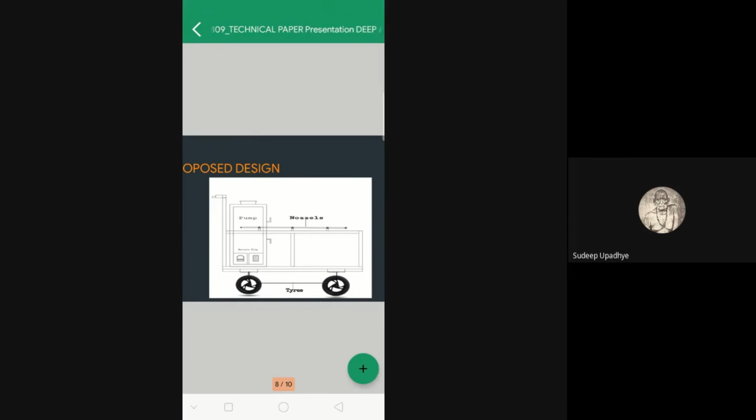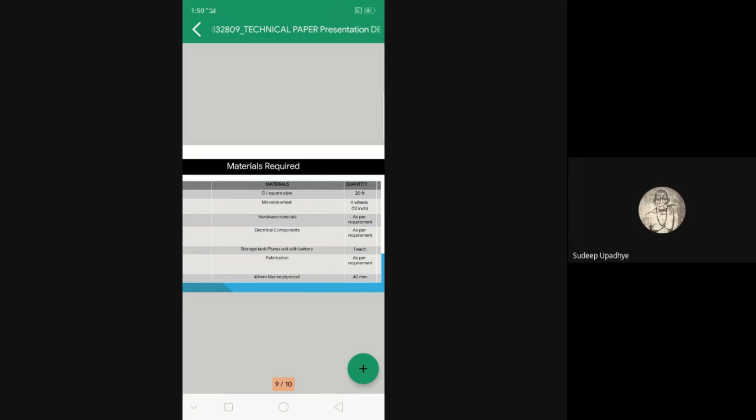These are the materials required: first is the GI square pipe, then the movable wheels, hardware materials, electrical components as per requirement, a storage tank in which water or pesticides can be stored, and the trolley which we made using fabrication and 40mm marine plywood. The discharge of our pump is 9 liters per minute.

Thank you for listening to us patiently.

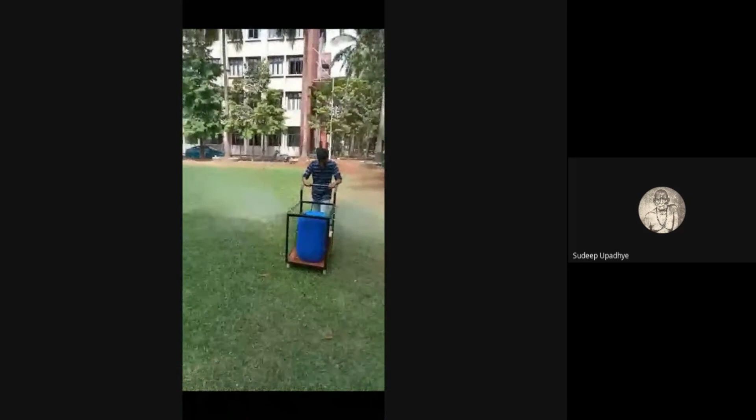Okay, can you show the video once again? Sure, just a minute. Is this visible, sir? Okay, fine, this one is another video.

What is the manufacturing cost? We are open to questions. The GI pipe is like a square pipe which is lower in weight, which is good for this proposed work or activities. Can this be used for weightlifting or carrying luggage too? Yes, it can, it is multi-purpose. We can put a drum containing 50 liters of water, and we can use it to carry a load of around 400 kilograms, to load grains of wheat or other farming equipment and activities. The labor cost is around 10,000 to 200... Okay, fine, thank you sir.

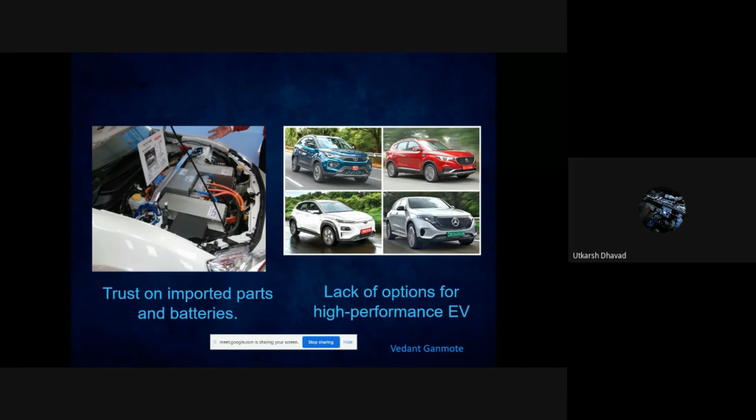There are some brands that provide EVs, including 2 or 4 wheelers in India, such as Tata Motors, Bajaj, and Mercedes Benz. Thank you.

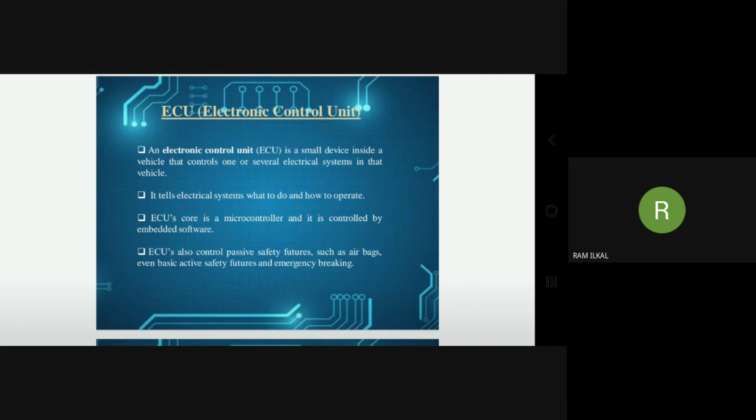Next slide. This is the diagram of the ECU, the electronic control unit. Airbag is an example of ECU. It is in the car and it strikes during a crash. This reduces the chances of injury to the upper body and head.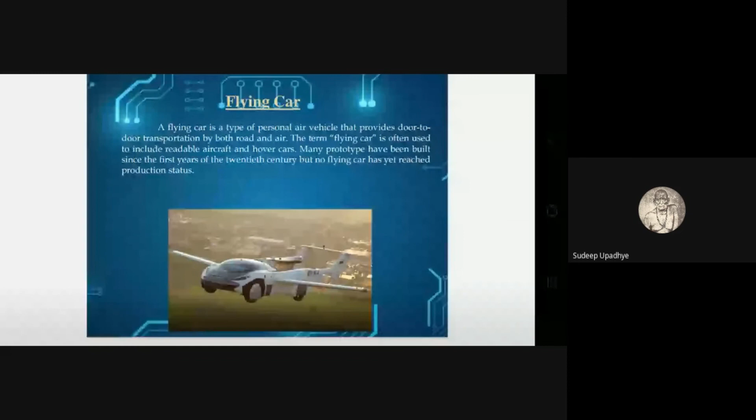Thank you for inviting me. Am I audible? Hi, yes, you're audible. Please go ahead. Am I audible? Hello. Yes, yes, yes, you are audible.

Yes, go ahead. Okay, so let us see what a flying car is. A flying car is a type of personal air vehicle that provides door-to-door transportation by both road and air. The term flying car is often used to include roadable aircraft and hover cars. Many prototypes have been built since the first years of the 20th century, but no flying car has yet reached production status.

Simply, the flying car is useful on road and also in air. As per our comfort, we can travel on road and also in air. So the flying car is an automated technology. It perfectly uses existing infrastructure created for automobiles and planes. That is, the car can fit into any parking space, uses regular gasoline, and can be used on road and also at the airport, where takeoff and landing infrastructure is available.

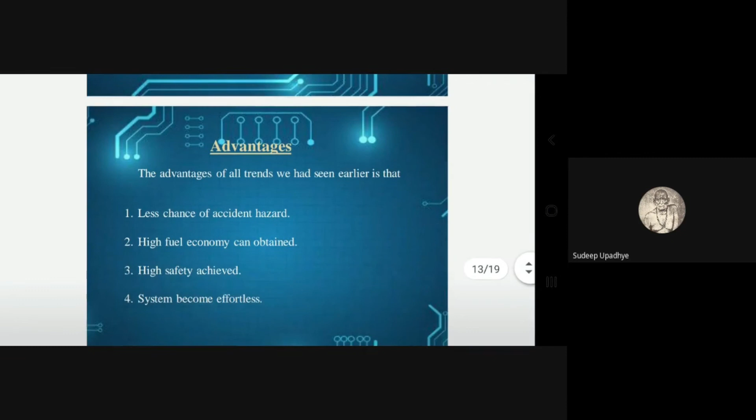So this is all about the comparison between Google driving car and autopilot Tesla car. Then let us see the advantages.

The advantages are, first one, less chance of accident hazard. As I said, the self-driving cars, Google car and autopilot Tesla car, both drive by themselves without use of manpower, and there is a light sensing system.

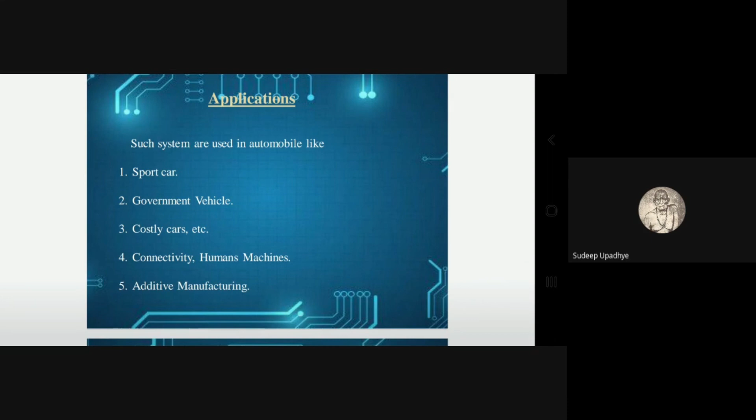Then finally the conclusion: by implementing this system we make driving simple, save fuel, achieve better efficiency, higher protection, and excellent comfort. The mechanical engineer implements some advanced techniques for results and customer satisfaction, with ideas coming from customer review.

So do you have a question? Okay, please show me the references once again.

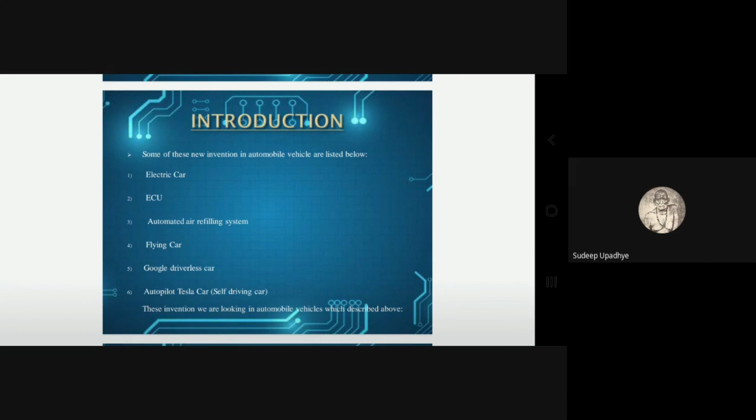I'm done, ma'am. If you have a question, you can ask.

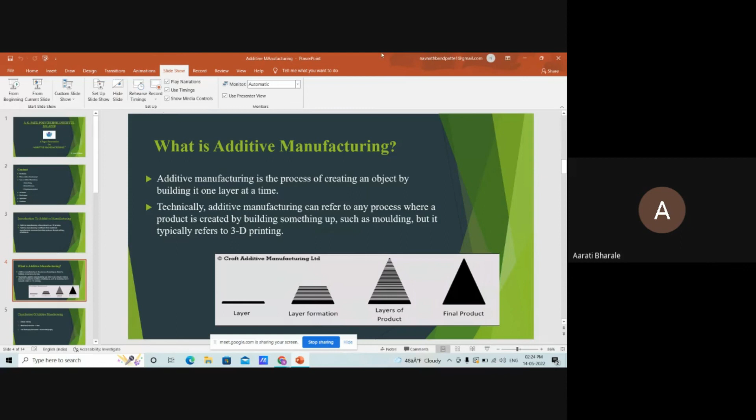So sorry for the inconvenience. It's okay.

So I will start again with what is additive manufacturing. Additive manufacturing, often referred to as 3D printing. The name itself introduces us that additive means the addition. As I have already told you about subtractive manufacturing, here also the name says subtraction of material. So as in subtractive, the material is removed from the product. Same way in additive manufacturing, the material is added layer by layer, only where required, using a digital blueprint until the exact component has been created. For example, like an office printer that puts 2D digital image on a paper, a 3D printer creates a component by depositing thin layers of material, one after the other, until the material is fully produced.

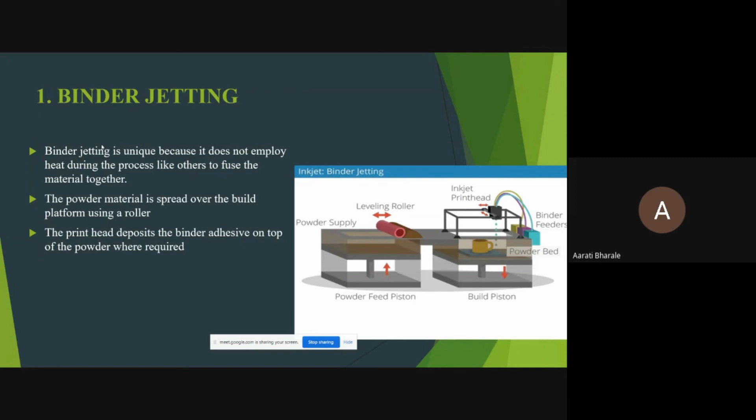Here are some advantages and disadvantages of binder jetting. The first advantage is parts can be made in a range of different colors, meaning we can use different colors to prepare the parts, and use a range of materials like metal, polymers, and ceramics.

Now the disadvantages: not suitable for structural parts due to use of binder material, and additional post processing can add significant time to the overall process.

Now the next one is material extrusion, that is fused deposition modeling. In this process, the material is pushed through a heated nozzle in a continuous stream and selectively deposited layer by layer to build a 3D object. Material extrusion is typically not as fast or accurate compared to other types of additive manufacturing. However, in this process, the materials used are nylon and ABS plastic.

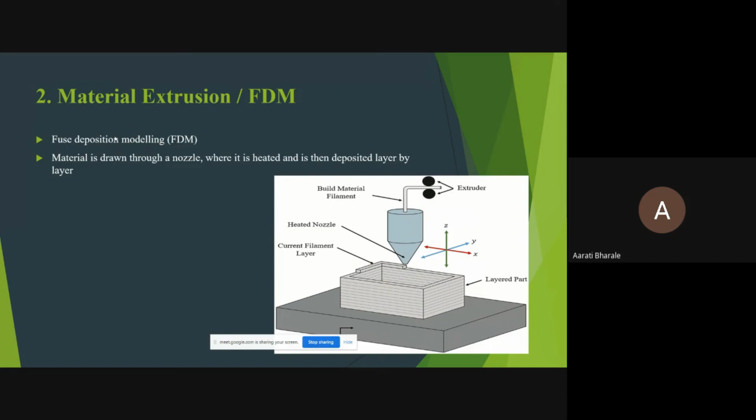Here are some advantages and disadvantages of material extrusion. The first advantage is wide selection of print material, and second is easily understandable printing technique. The disadvantages are visible layer lines, and the extrusion head must continue moving or else the material bumps up.

Now, vat polymerization, also known as stereolithography. In this process, the liquid is cured by a light source, turning into a solid. The special resin known as photopolymer is used as the printing medium in all forms of vat photopolymerization printers. When exposed to a specific wavelength of light, the molecules of liquid photopolymer quickly bond together and cure into a solid form, a process known as photopolymerization.

Most 3D printers that use photopolymerization keep liquid photopolymer in a container or a vat with the light source to selectively cure the liquid photopolymer into the layer using information from a CAD file. The build platform is then resubmerged into the leftover resin and the process is repeated for the subsequent layer until the design is entirely produced.

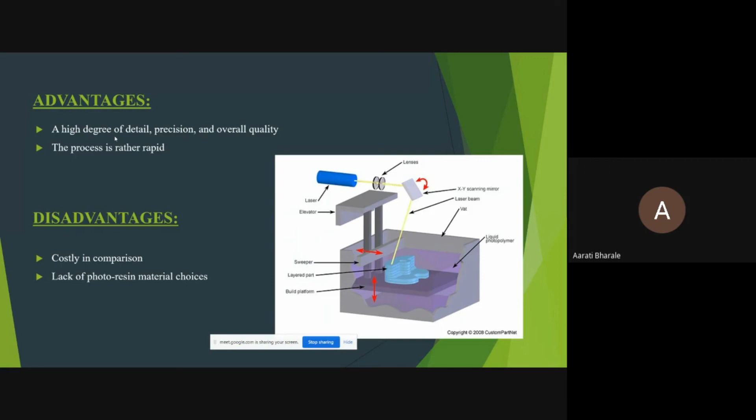The second advantage is manufacturing plus assembly: we can prepare different parts and then assemble them. Now the disadvantages of manufacturing: first is part cost, the production costs are high.

Materials for additive manufacturing are frequently required in the form of exceptionally fine or small particles that can considerably increase the raw material cost of the project. Next is surface finish: as I told you in photopolymerization, if the component doesn't move uniformly, bumping can occur, so we won't get a good surface finish. Then dimensional control, which determines part to part variation and clearance between two parts.